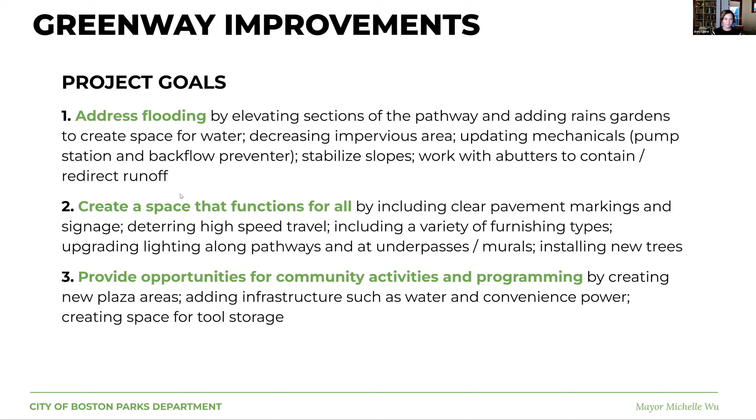And I also wanted to provide an update on the schedule since this has shifted a little bit. So we're in the process of finalizing the construction documents and the permitting process. So based on recommendations from our engineers, we determined that an investigation of subsurface conditions in the areas of the rain gardens would be beneficial. That will provide more information to the bidding contractors.

So this means that we are applying for an amendment to our permit with the Conservation Commission, and we are on the October 22nd agenda. So once we have that approval, we will go out to bid. And then for anyone not familiar with the public procurement process, in that bidding, we are required to then award the contract to the lowest responsive and responsible bidder if that bid is within our budget. So our goal is to really go out to bid with a project that we know we can cover with the funding that we have.

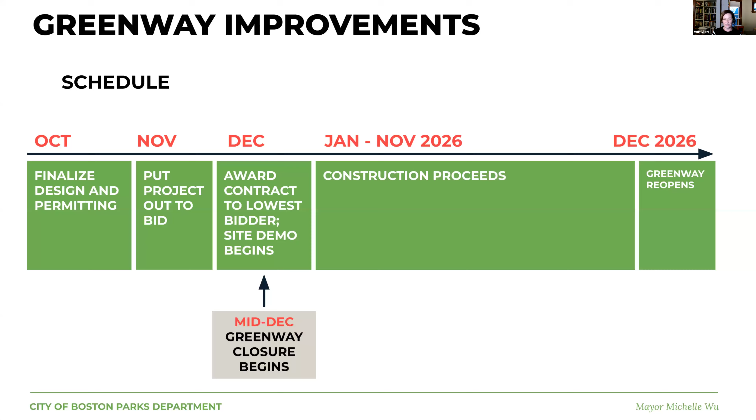We anticipate starting work in mid-December. And so while we are a little behind what we had originally intended with the schedule, we are still aiming to complete the project by the end of December 2026. So funding for this project includes a combination of capital funds and then a Land and Water Conservation Fund grant from the National Park Service for $1 million.

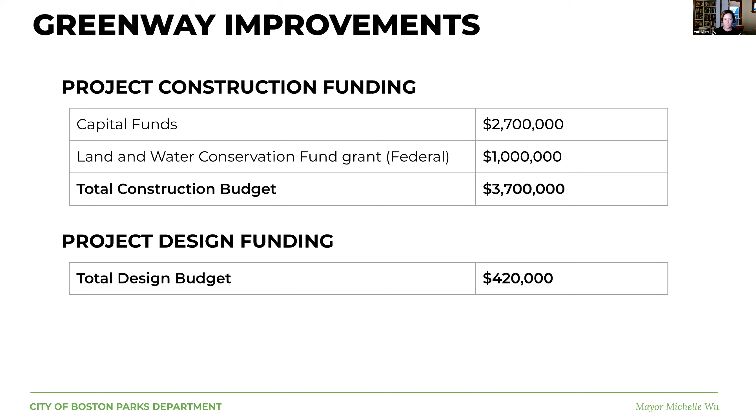And then the existing conditions, which I think many of you are quite familiar with. We shared some of these slides in previous presentations, so I'll go through them fairly quickly. As I think most of you know, the Greenway experiences chronic flooding due to the fact that it's a low area in a low-lying part of the city with a relatively high water table and drainage issues. So much of the paving is also in poor condition, as are furnishings and vegetation.

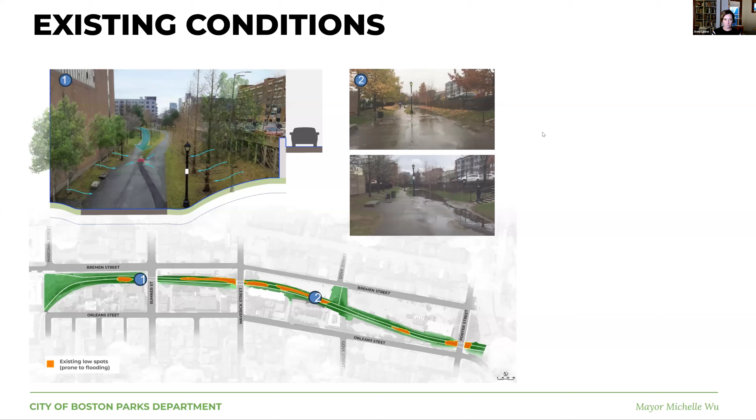So improvements will include elevating the path to get it out of the flood zone and to create space for water while it infiltrates. It'll include new paving and pavement markings to clarify areas for cyclists and pedestrians. New site furnishings, including benches and trash receptacles. New lighting, as I mentioned, including light poles as well as flood lighting at the murals. And then new trees and rain gardens.

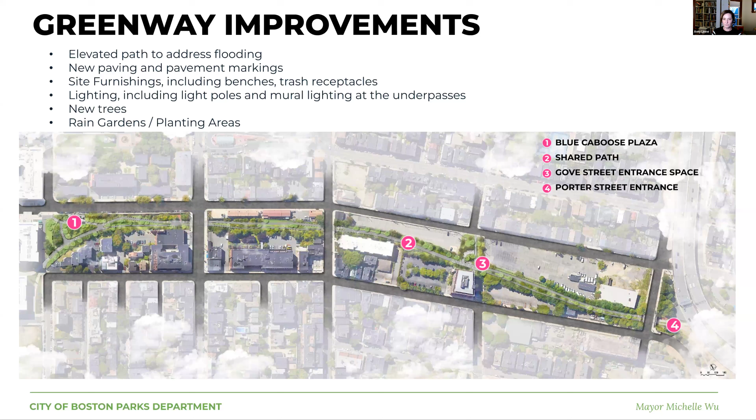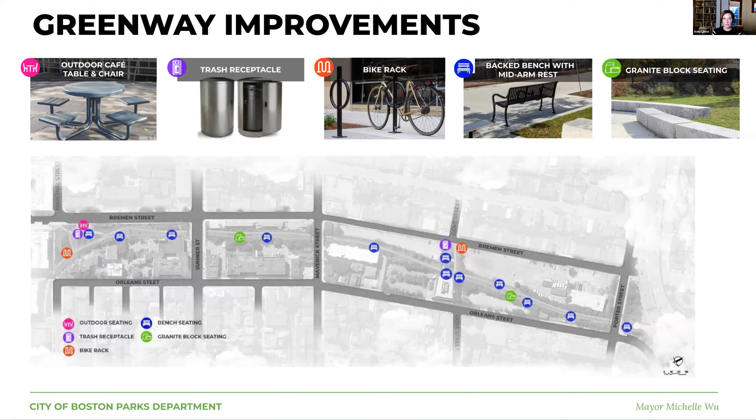So the furnishings include outdoor tables at the Blue Caboose, the new trash receptacles throughout, bike racks at the entrances, and benches and granite block seating. We also have a bike fix-it station near the Blue Caboose. So we have had an arborist assess all of the trees on the site, and so those that are dead or in extremely poor condition will be removed, and we will plant approximately 45 new trees.

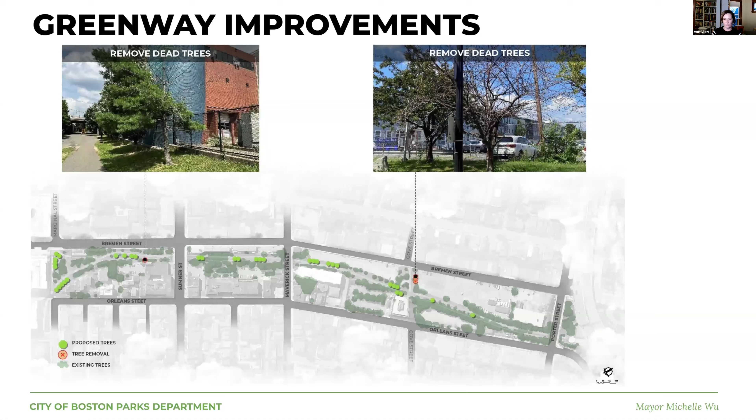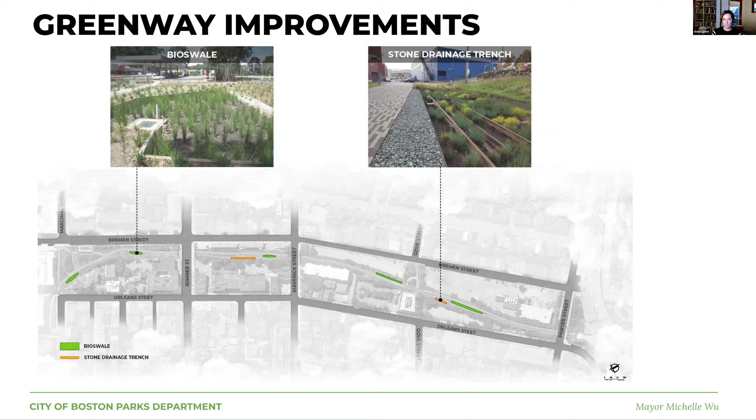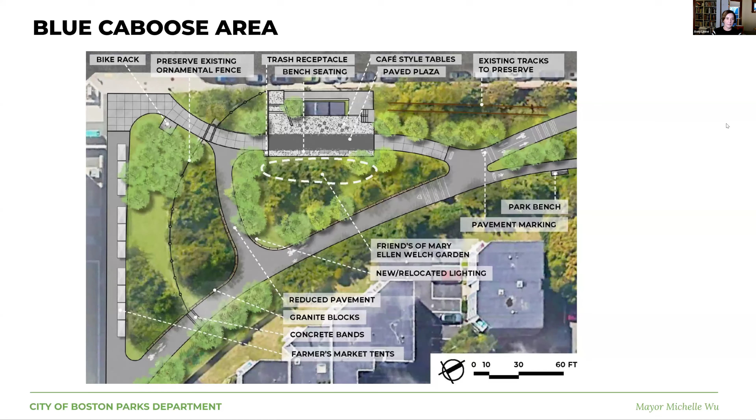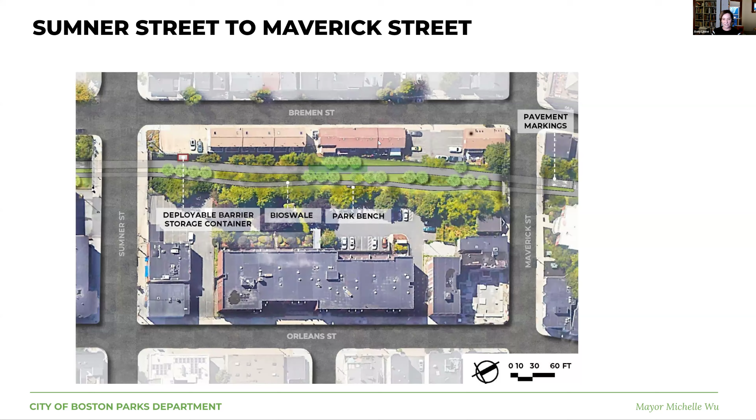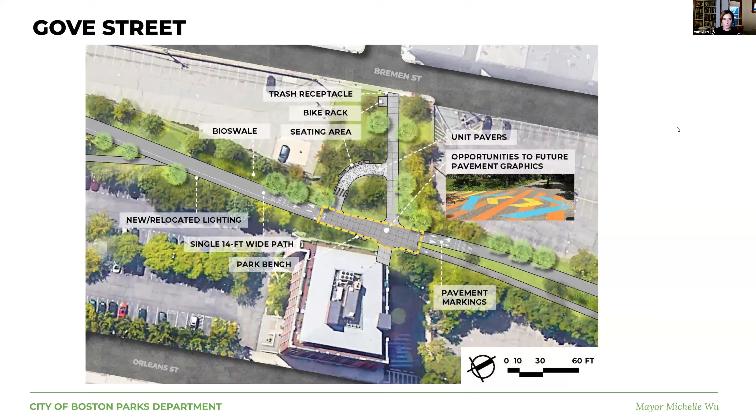And from Sumner Street to Maverick Street, we have separate paths for cyclists and pedestrians. And then in section, you can see that and how the pedestrian path is at a little higher elevation. So in a bad flooding condition, that would be the route to take to stay out of the water. And then from Maverick to Gove Street, where the corridor is narrowest, we have a single 14-foot path. At Gove Street, then we have another plaza area with seating. And from Gove to Porter Street, paths are separated again, which creates another area for rain gardens.

And so at those rain gardens, we are looking at incorporating short stretches of boardwalk. So this will allow, again, more space for water. We do have a design to include some rat proofing underneath these boardwalks. Sometimes those areas can be popular for rat habitat. So we've received recommendations and guidance on that, incorporating a metal mesh layer just to prevent the opportunity for rat habitat.

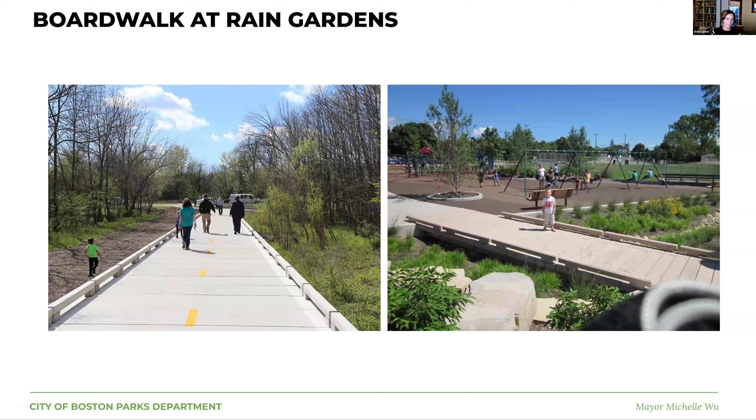And so with that, I'm going to turn it over to my colleague Maria Castillo from the Transportation Department to talk about an alternative route during construction. Thanks, Amy. Can you hear me okay? Mm-hmm. Great. So hey everyone, my name is Maria Castillo.

I am a transportation planner in the Streets Cabinet, and I have been working with my colleagues in the Policy and Planning and Public Works Department to come up with an alternative route during the Greenway closure. So obviously we know that the Greenway is a very important recreational and transportation resource for people in East Boston, and we know that there are a lot of people who use it weekly and daily. And so we have been exploring some ways to create a safe and comfortable route on one of the local streets for both families and individuals who rely on this path. Next, please.

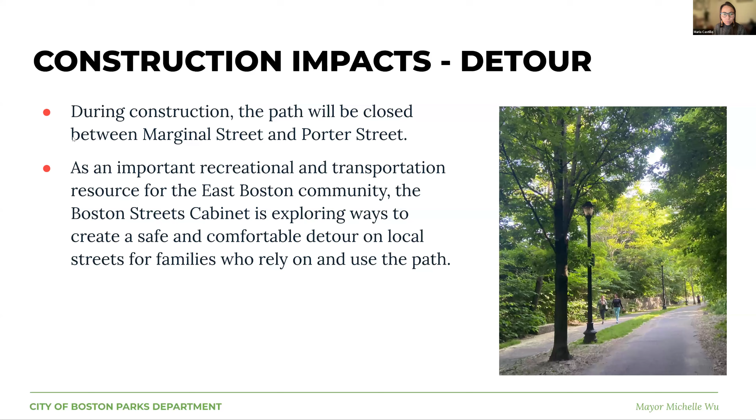So the route that we are proposing as an alternative is on Orleans Street, turning Orleans Street into what we call a slow street, and this would be all the way from Marginal Road to Porter Street. We see that Orleans is just less than a block away from the Greenway, and is very close to the Greenway access points too. So hopefully this will allow people to not go too far from their normal commutes.

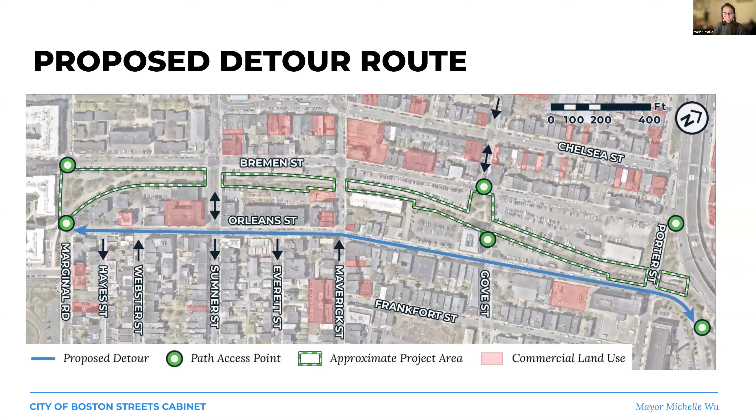Next, please. And the way we're proposing to do this is by using mostly two strategies. One is signage and the other one is traffic calming. So for signage, we want to install things like pavement markings that indicate that there are going to be cyclists on the road. So this is a shared road, a shared space that people in cars, on bikes, on scooters, and other modes of transportation are going to be sharing with others.

And the other type of signage is directional. So signage can indicate this is a street where people on bikes will be going in both directions, right? People on bikes, people on scooters, and again, there may be kids playing, and there may be more families and people with kids in strollers, etc.

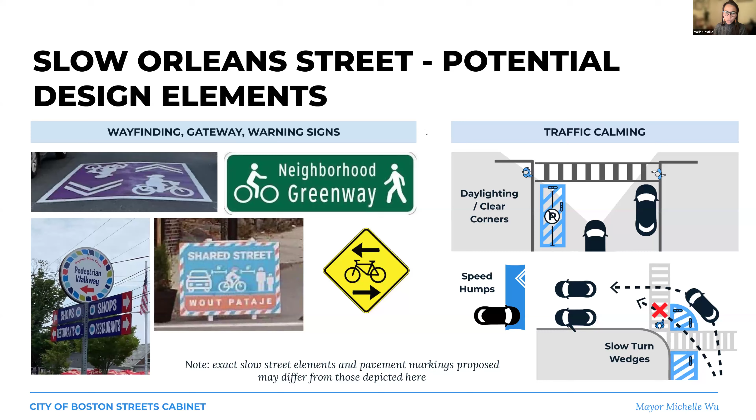We will add pavement markings to indicate that cyclists are going in both directions, and we'll make sure that the parking spots are well striped, and speed humps reducing the speeds to a maximum of 20 miles per hour. And again, when we reach another large intersection, like with Maverick Street, people coming from Maverick Street onto Orleans Street will have a very clear understanding that they're entering a shared road. And signage will include not only directional for bikes and for vehicles, but stop signage is also included in the plan. Next slide, please.

And so, as Amy was saying, the Greenway closure will begin in December, and we will start getting things on the ground as early as April once the winter moratorium is over. There is a chance we can do some street signage before that, but speed humps, for instance, will be after the winter moratorium. And we're thinking too that if the community likes some of these strategies that we will be implementing, these things can become permanent even after the Greenway reopens.

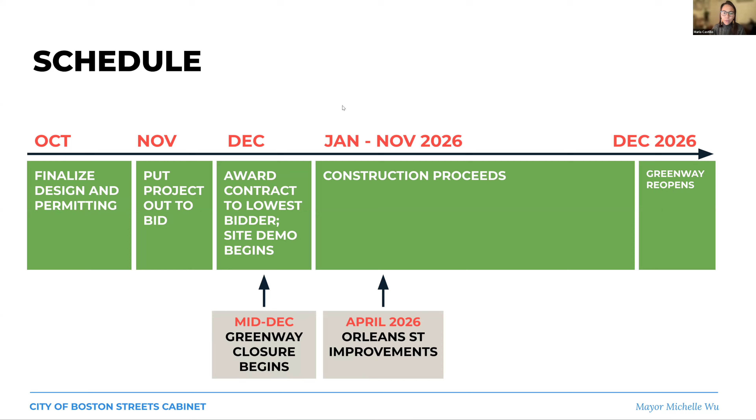Next. Thank you. That's back to you, Amy.

So with that, I see we do have some comments in the chat. I also want to open it up to anyone that wants to raise their hand. Alex? I think the streets cabinet knows that sharrows are not safe and don't work, so why is that what you are proposing?

Hi, Alex. So we have been looking at different alternatives. There are obviously some financial restrictions as well. We want to make sure we have something as soon as we can in the spring. And we also want to make sure that, like, we would like some of the things that we installed to become permanent, ideally. We had some other ideas of doing things that maybe the community would want to get rid of after the Greenway reopens, but

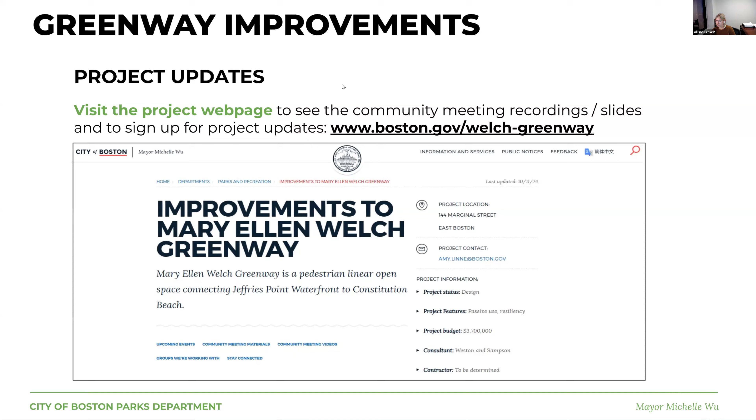Let's see, Allison. Hi, everyone. Two things. So I live on Orleans Street and I have two concerns. One, I agree with Alex. This doesn't seem like a particularly safe option. I use the Greenway every day and I often see kids riding unsupervised, which is great. It's a great part of the Greenway. But I have serious concerns that having two-way car traffic plus two-way bike traffic on our street is a safe option.

In addition, there is a large hotel opening on the corner of Orleans and Porter Street around the same time that this will be going into effect. So I'm also concerned that there might be increased traffic to Orleans Street at the same time. And I worry that this might inhibit parking for residents in the area, insofar as the speed bumps or additional restrictions around the crosswalks might be a problem. So I'm a little bit frustrated to hear this. I don't know what the answer is, but I do wonder if perhaps segmented short-term closures to the Greenway during construction might be a way to reduce the impact.

My second bucket of concerns relates to the Gove Street crossover. As someone who lives on Orleans Street, I often use the Gove Street pass to get to Bremen Street. And I know that many of the folks in my neighborhood who have kids that go to the elementary school also use that pass. So I'm wondering if there's a way to at least keep that part of the Greenway open or only closed during a necessary period, so that people can use that to cut through, because otherwise you're walking up to Porter Street or down to Maverick Street, which could be a significant detour.